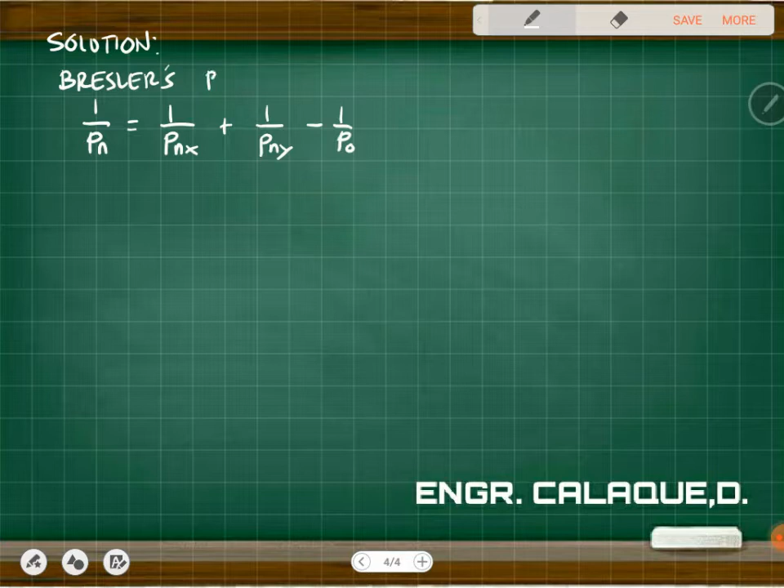Bali dito, kunin ko na lang yung formula na to. Ayan, so kukunin ko na lang yan, and then yung magiging solution ka dito. So using Bresler reciprocal load method.

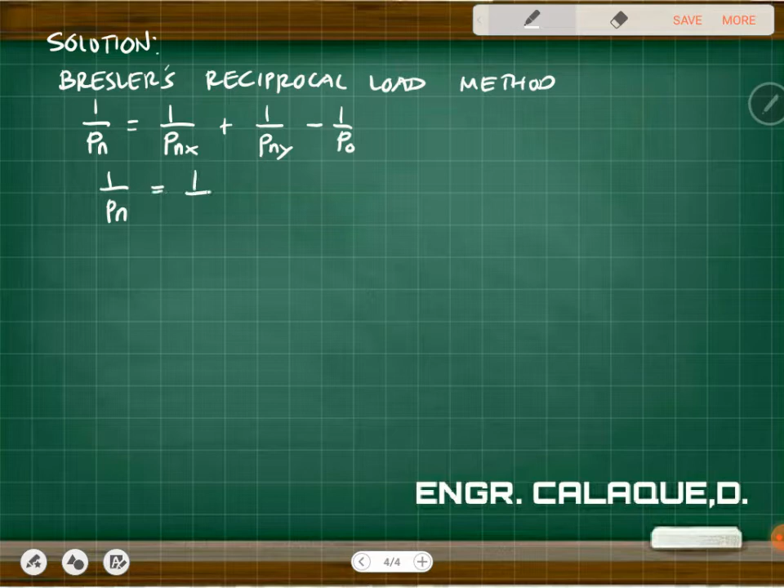So meron na tayong 1 over yung PN is equivalent to 1 over yung PNX natin na compute, binigay na ng problem, no? So 1 over 564 plus 1 over 600. So yung issue na lang natin yung value ng PO. So computing ko na lang muna yung PO.

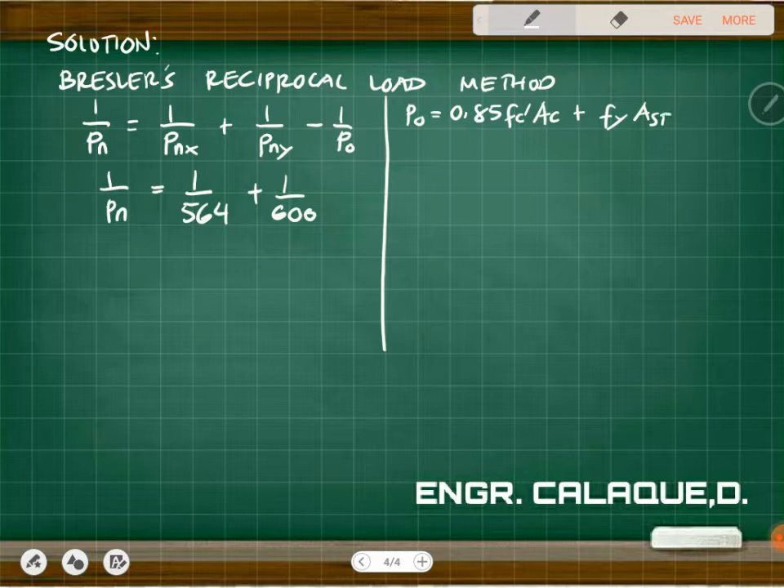So yung PO natin is just 0.85 ng FC prime area ng concrete plus yung FY, ito naman yung sa steel, area ng steel. So yung PO natin is just 0.85 ng FC prime, and then area gross minus area ng steel plus yung FY area ng steel. So yung PO natin is 0.85.

Yung FC prime natin is saan na yan? 28. And then area gross, computing ko na lang muna to para hindi masyadong mataas. So yung area gross is 400 by 400. Diba yung dimension natin? 400 by 400. So this one is 16, then apat na, 0.

And then yung AST naman natin is meron tayong 12 na tag 25. Diba? 12 yun. So 12 na tag pi over 4 squared. So this is equal to 5890 square mm.

So ngayon, makukompute na natin yung value ng PO. So yung PO is just 0.85 ng 28, and then yung area nung gross is 160,000 minus 5890 plus yung FY natin na 414 times 5890. So expected yung sagot ko dito is Newton. So gusto ko maging kilonewton na agad, so divide 10 to the power of 3.

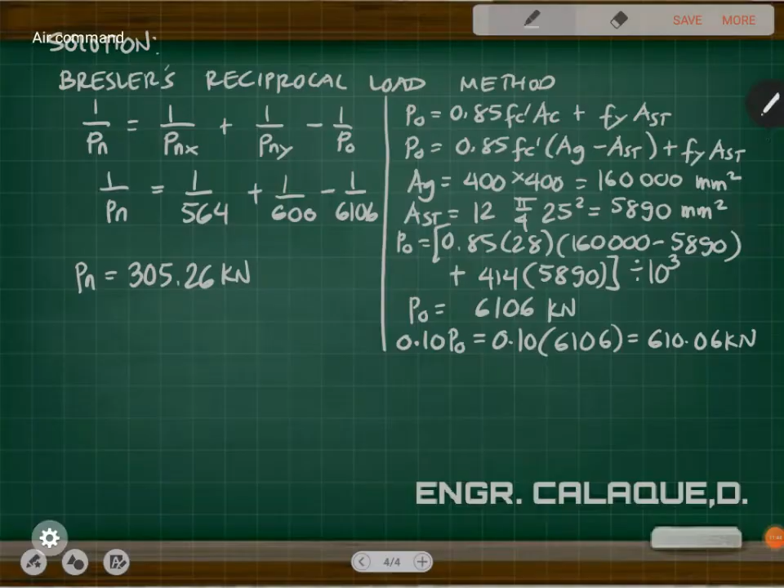Okay, so diba? 1 over Pn equals 1 over 564 plus 1 over 600 minus 1 over 6106. 305.26. So bali dito...

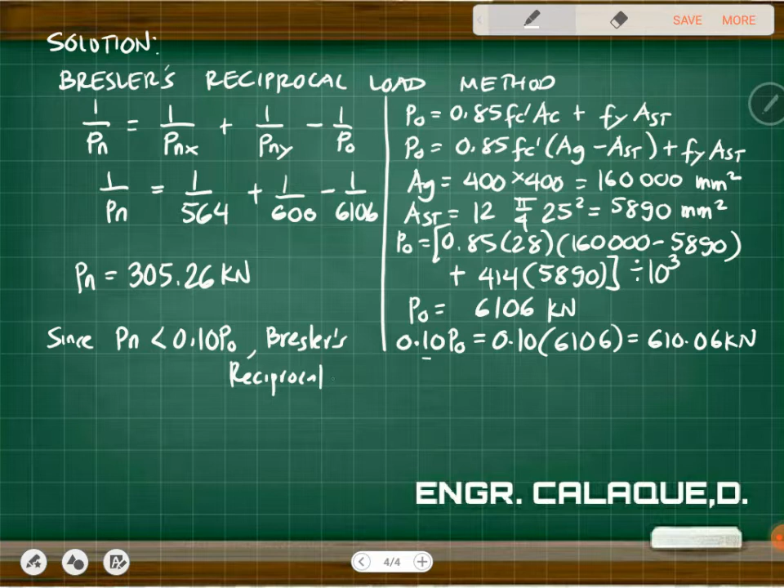So since yung PN natin is less than nung 0.10 nung PO, diba? So ibig sabihin yung Bresler reciprocal method does not apply. So di siya pwede, no? Kasi kailangan ma-meet natin yung condition ni Bresler reciprocal method.

So since hindi siya nag-apply, so pupunta ako dun sa load contour method, no? So pupunta ako dito. And then yung gagamitin ko na formula, since square man ako, so tanggalin ko na to. So ito lang yung kailangan ko. Okay?

Okay, so compute-in natin yung Pn. Yung Pn natin is just Pu over phi. So assume ko na lang na yung phi na gagamitin ko is 0.7. Pero depende yan, ha? 0.65 pag 2010 o 2015. Depende yan, so 0.7 na lang yung gamitin ko. Pero anyway, kung ano yung code na ginagamit mo, kung 2000 or 2010, so yun na yung ipalit mo. So bali dito meron tayong Pn.

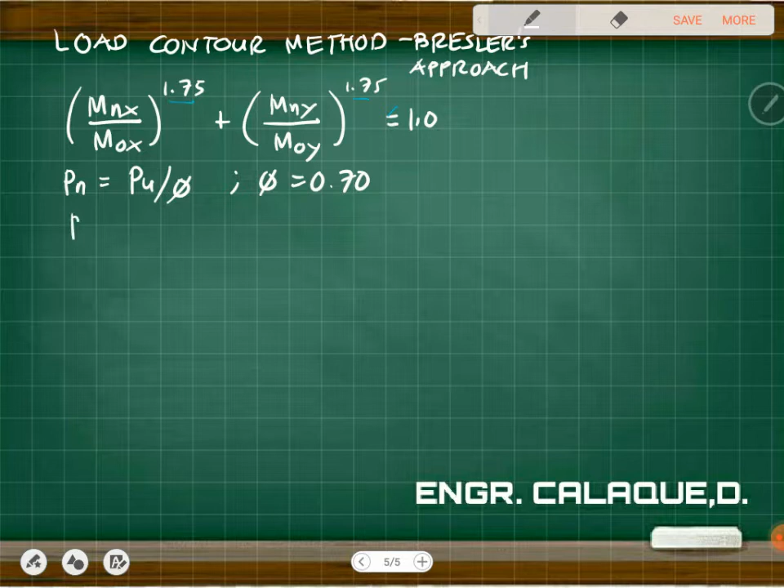Okay, this is 2001. Pag lagay ko na lang 0.7, 0.65. Diba? Same lang yung 2010 tsaka 2015 in terms of NSCP.

So bali dito yung PU natin is yung, saan na yan? Ito, 272.09. So we have 272.09 all over 0.7. So assuming yung 2001 na lang ginamit, kasi yung reference ko. So anyway, plug in mo lang yung 0.65 kung gusto mo. Basta yung process the same. 388.7

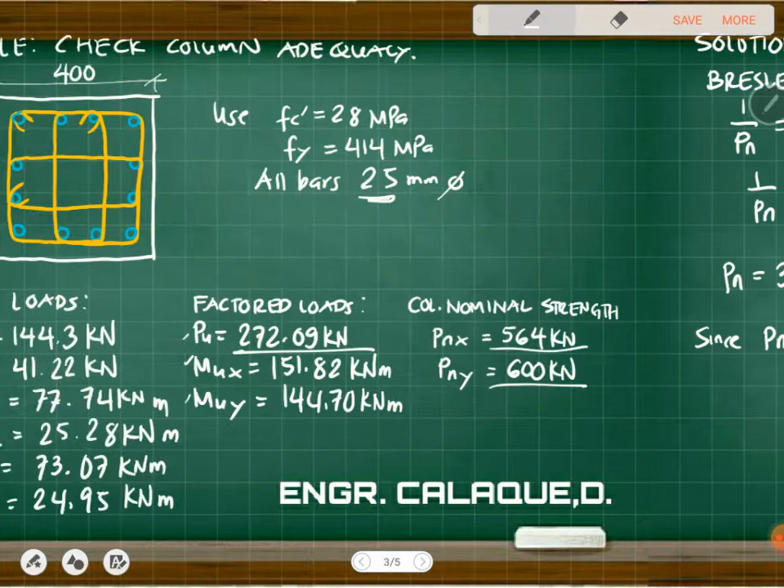kilonewton. And then yung MNX natin is meron na tayong Pn, Pn and then EY, diba? Yung Pn EY, and then yung MNY is Pn EX. So pag X, Y yung kasama niya, pag Y, X yung kasama niya. Laging ganun, no? Makikita mo din yan sa figure. Yan dito, diba? Yung PNX, so EY. Pag PNY, EX. No?

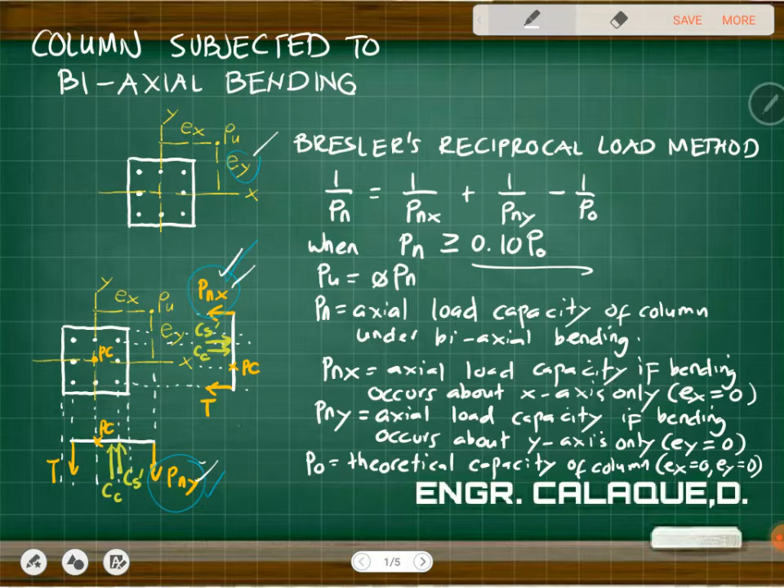So I have now Pn, that is 388.7 times 0.558, and this is 216.89 kilonewton meter.

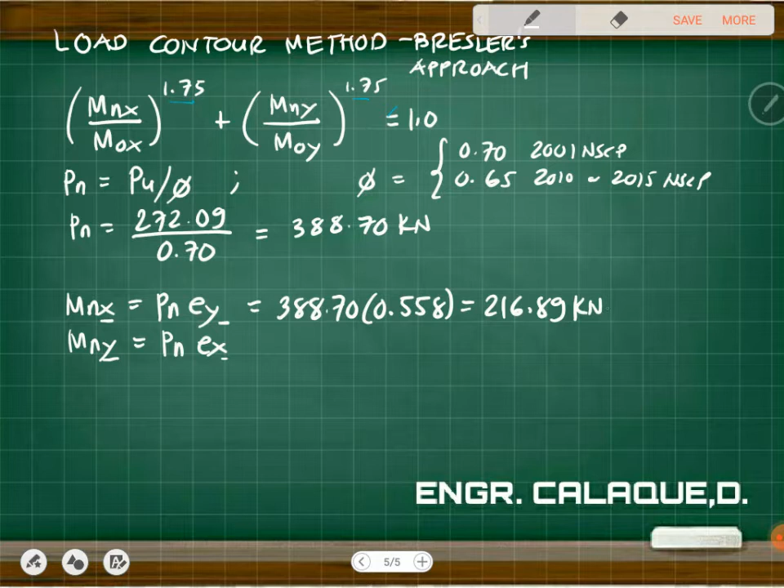And then dito meron tayong 388.70. And then yung EX natin is... hindi pa natin nakuha yung EX.

Kunin ko muna yung EX. Na-plug in ko na siya agad eh. Yung EX natin is just yung MUX over yung PU.

So kung babalikan natin yung given, yung MUX natin is ito. So 1.5...

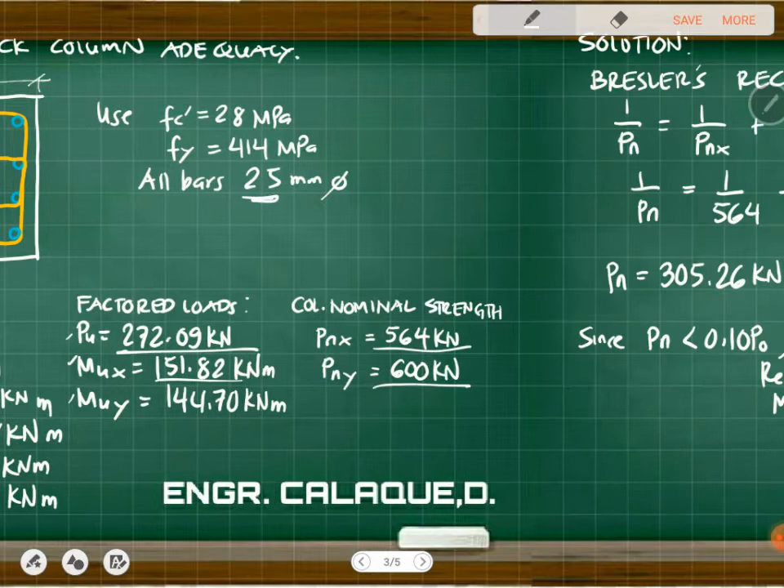EX ay baliktad na. EX...

Is pag X laging Y yung kasama niya, no? And then pag Y yung X yung kasama niya, na baliktad.

Okay, so bali dito meron tayong MUY, that is 144.7. So this one, 144.7 all over PU na 272.09. So we have 272.09.

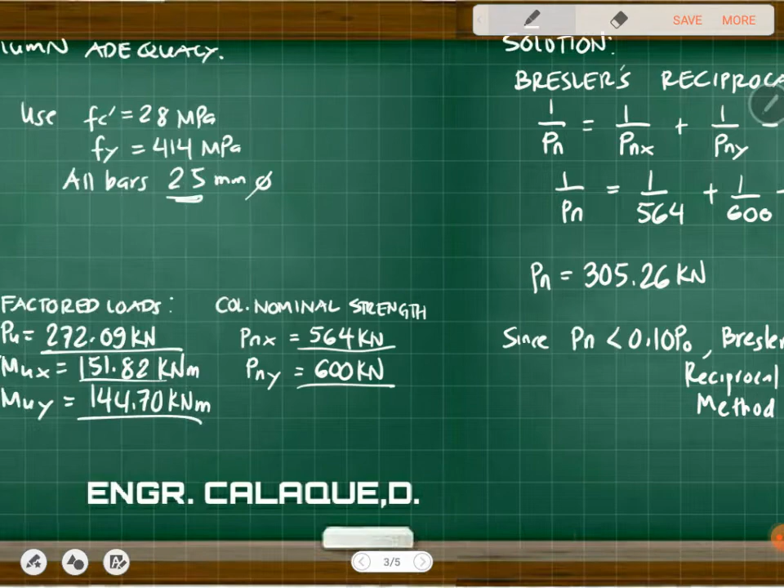And then pag Y, so yung X yung moment. So I have... minsan malipat yung gana, no? 151.82 all over...

272.09. So ang answer ani niya is 0.532, and this one is 0.558. So muna to, no?

So makukuha na nato ang MNX, and that is equal to, pag X, so this will be Pn EY. And then pag Y, this will be Pn...

EX. Okay, so yung Pn nato is 388.7, and then yung EY natin is 0.558.

So therefore this is 216.89, and then this one, we have 388.7, and then yung EX nato is 0.532. So this one is...

Mali ito na copy ko. Ilan yan? 388.7 times 0.558,

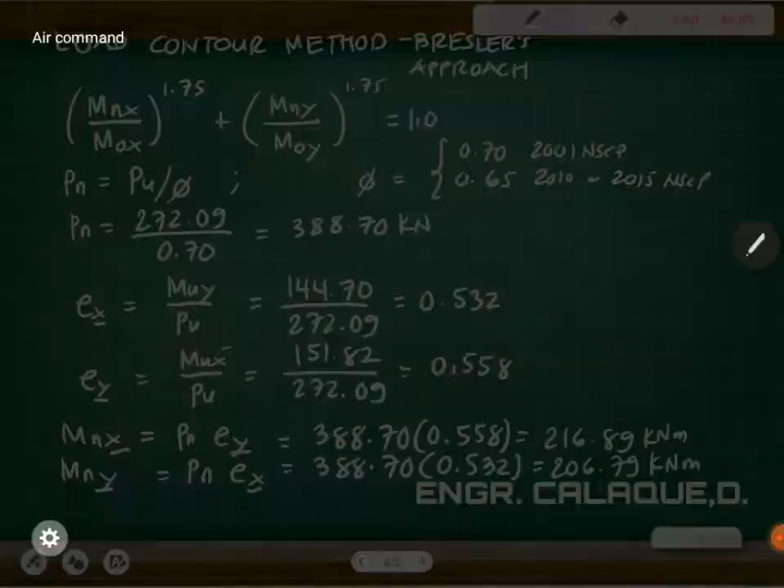Ano nga yung isa? 89. Okay, 89.

So ngayon makukuha na natin yung, basta tandaan niyo lang lagi ito, no? So pag E is X, yung moment mo is Y. Pag yung E mo is Y, yung moment mo is X. Pag yung moment mo is X, yung E mo is Y. Pag yung moment mo is Y, yung E mo is X.

So punta tayo dito sa MOX. So this one is yung PNX naman. So pag X mo yan, so Y yung dito.

Next is yung MOY. So this will be MNY. And then pag Y mo yan, so yung E mo is X.

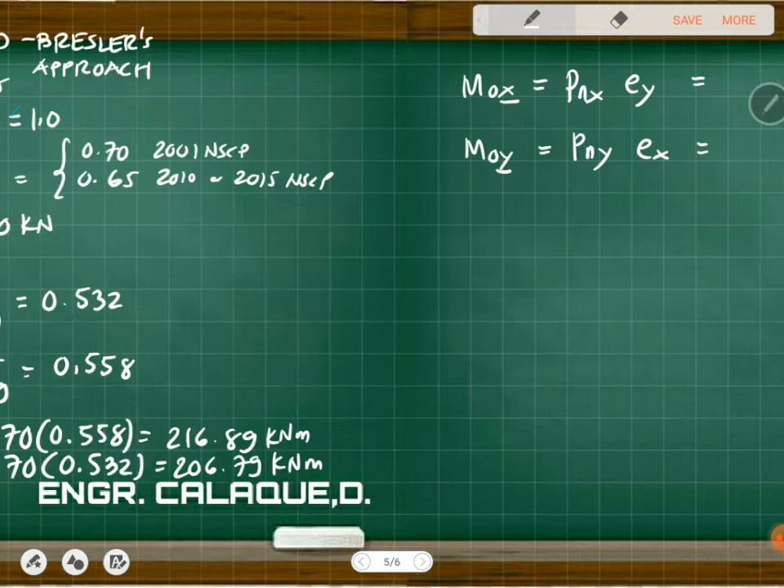So ito is based on capacity. Ito is based on applied load.

No? So yung capacity natin is 564 and 600. So MOX is 564 all over times...

0.558 for ey. And then for Pny, that is...

600. So we have 600 times 0.532. Okay, so thus yung sagot nito is ilan yan?

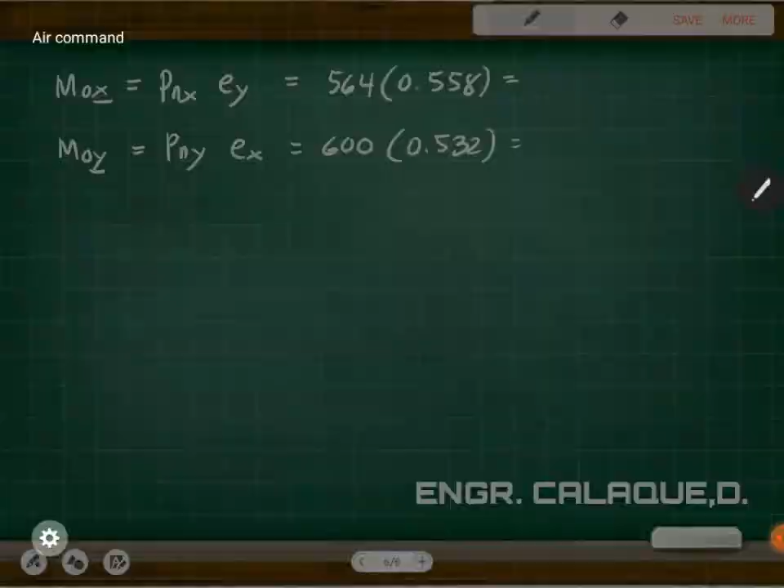We have 564 times 0.558. Okay, and then 600 times 0.532.

Okay, so bale 564. So this one is 314.71 kilonewton meter. And then dito is 319.2 kilonewton meter.

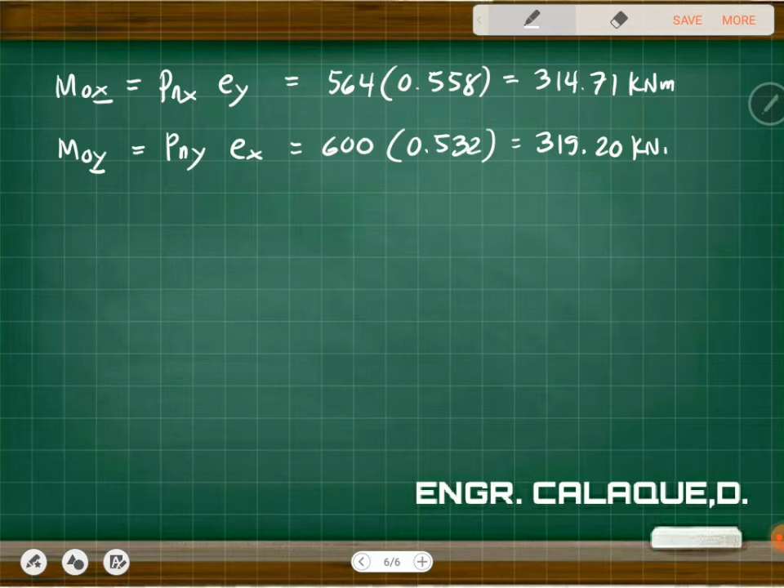So balikan natin yung formula. Dito ngayon, substitute lang natin yung mga values. Okay, substitute lang natin yung values.

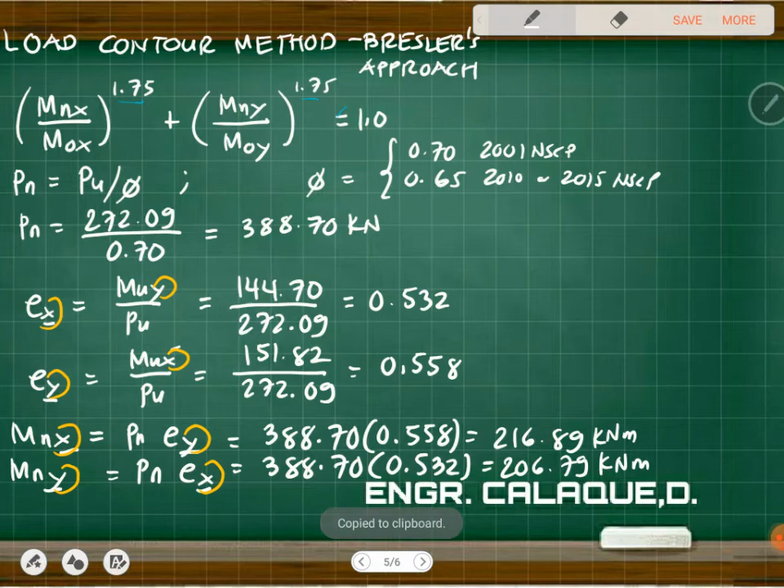So bali yung MNX natin is 216.89 all over MOX, 314.71, raised to the power of...

1.75, plus 206.79 all over yung MOY na 319.2, raised to the power of 1.75.

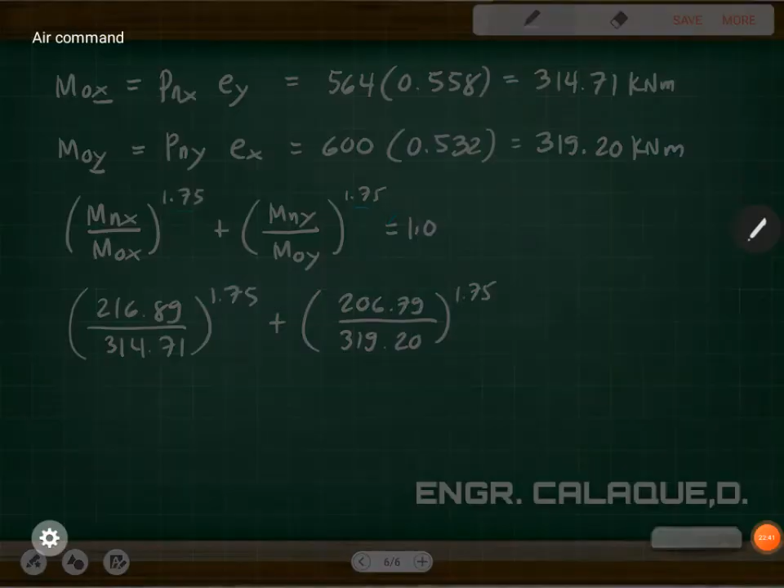Okay, so yung sagot nito is kumpitin ko muna. So this one raised to the power of 1.75, plus this one raised to the power of 1.75.

So we have 216.89 all over 314.71, and then 206.79 all over 319.2.

So 0.989. So 0.989. So check lang natin kung okay yan.

So since this is less than 1, so column section is adequate. Okay? So ganun lang, no?

So ganun lang yung tatandaan niyo. Basta yung highlight lang dito kasi ito yung medyo nakakalito. So basta yung moment mo anong x-axis, ito yung y mo. Yung e mo is y.

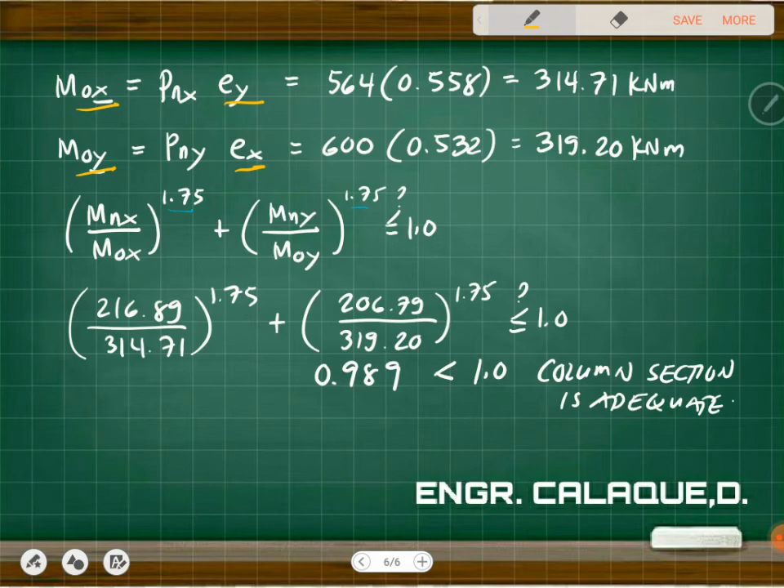Pag yung moment mo is naka-y, so yung e mo is x. So ganun lang, so parang nag-moment ka lang dito. Di ba? So kung dito yung load mo, times mo nito, so ito yung kinuha mo, yung mx.

Pag dito yung load mo, then ito yung moment arm mo, so dito yung my mo, no? Kaya yung y tsaka yung x laging magkasama, tsaka yung x tsaka yung y laging magkasama.

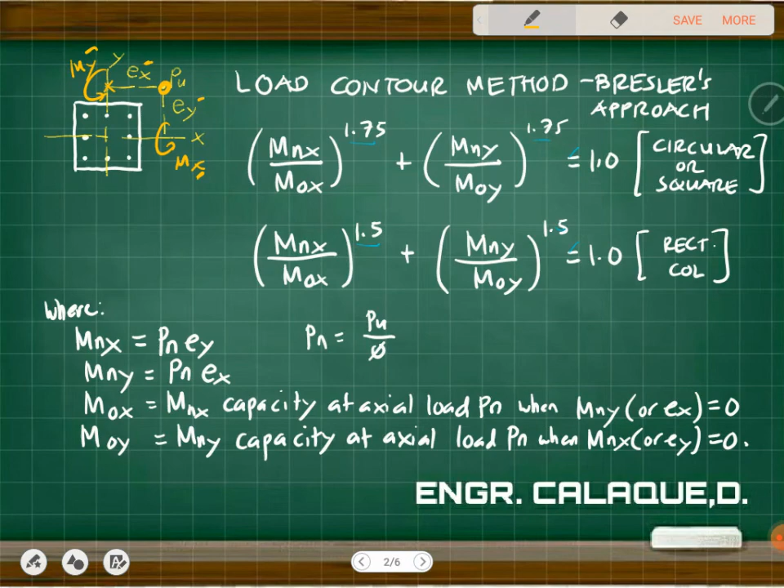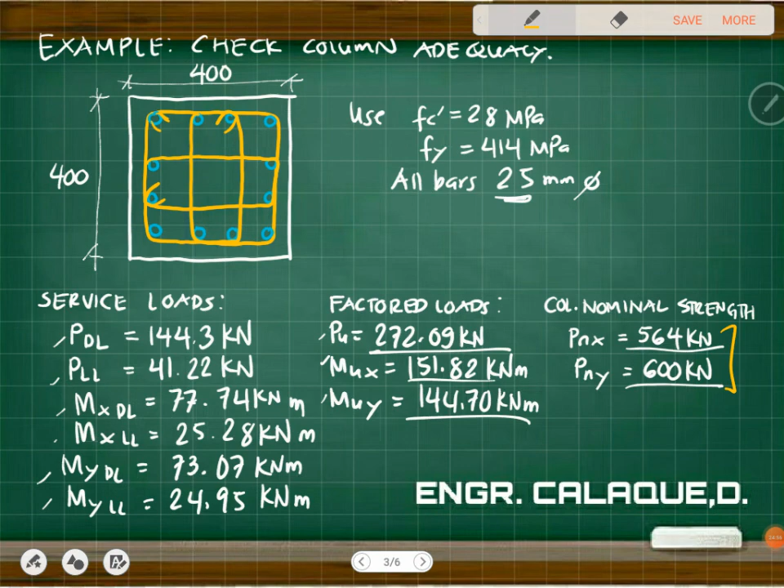So I think that's it. So tuod no kani siya, ang pagkumpyutan is katong sa eccentrically loaded columns. The same lang ang procedure na. Wala dyan na bago, the same lang dyan. So that's it, and see you in the next video. Thank you.